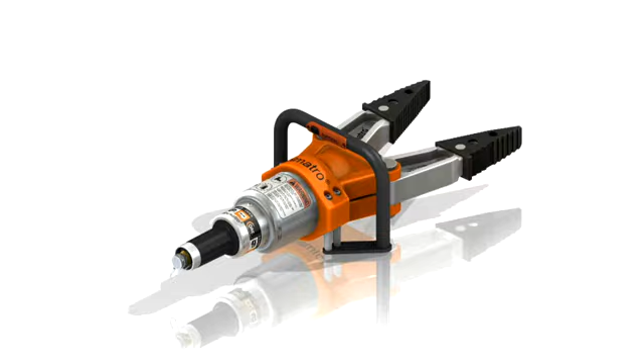With rescue equipment like this, performance is everything. The product must work reliably every time. SolidWorks contains a powerful set of tools we can use to test the performance of a design in many different ways. Two key areas that concern most designers are function and strength. Let's look at how SolidWorks Motion and SolidWorks Simulation tools can help us evaluate these goals.

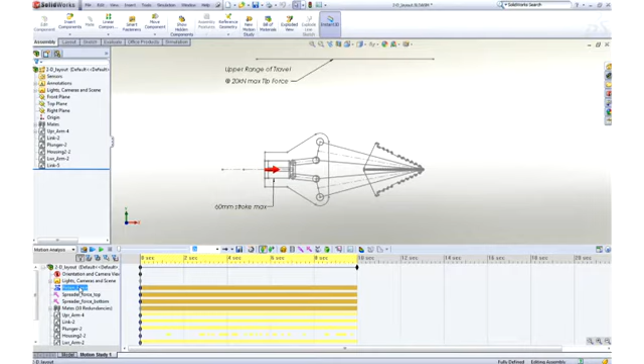We've seen how we can assemble our design in SolidWorks, but how do we know it's going to function correctly? It's invaluable to be able to validate the spreader operation without the need to cut metal or build prototypes, like in the case of this sketch layout concept. With SolidWorks Motion, we can easily test our design during the early stages of development to aid in sizing parts, bearings, motors, and actuators to ensure they meet our design goals.

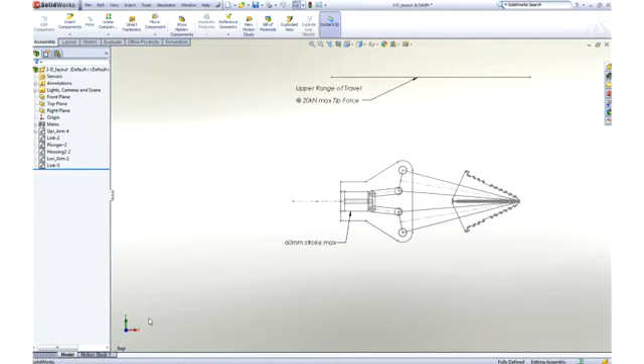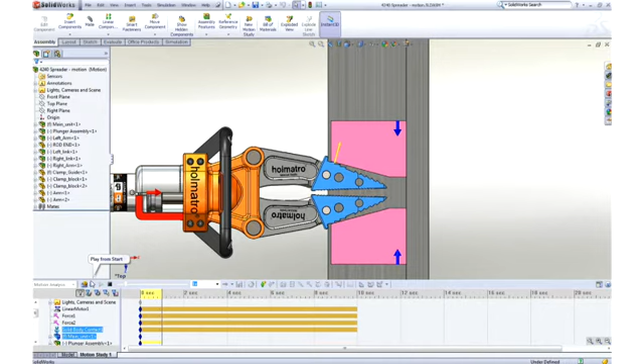As we go through and refine our design, we can continue to use Motion to validate the function. Here we have a test fixture to determine the piston force required at different jaw openings to meet a minimum spreader force requirement. In SolidWorks Motion, we need only apply an actuator to drive the piston through its range of movement, the desired spreader force on both blocks, and finally specify that the tips of the jaws and the blocks will contact. An accurate physics engine then calculates the resulting motion, forces, velocities, and accelerations.

We can look at a wealth of engineering data such as the bearing loads on the pins, how quickly parts are traveling, and so on. With the built-in plotting tool, we can quickly show the required piston force with respect to the open position.

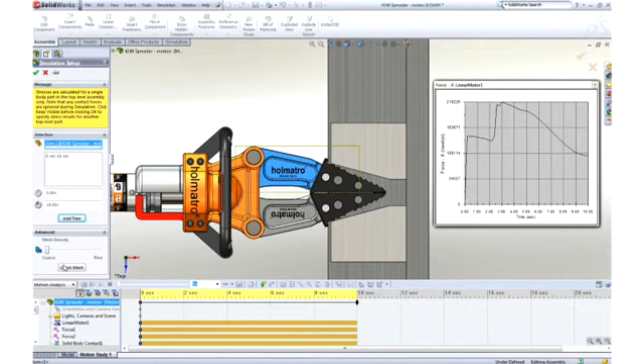We're even able to check the strength of selected parts in the mechanism over the entire range of motion. This can really help in determining if we need to use SolidWorks simulation for a more in-depth analysis to ensure that part strengths meet our goals.

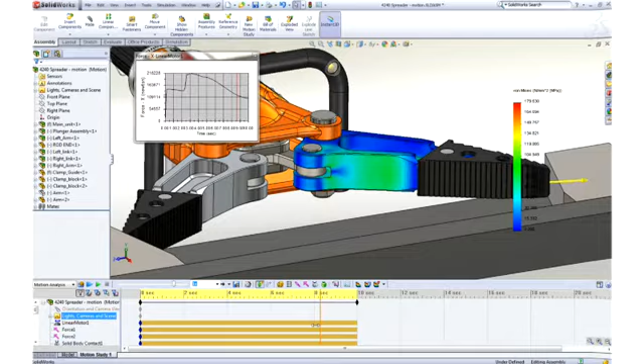Let's now focus in more detail on the structural aspects of our design with SolidWorks simulation. If we're concerned about parts failing, deflecting too much, or reducing weight, this is the tool for the job. Simulation can be used from the part level all the way up to the complete assembly to easily identify if the design will meet our needs.

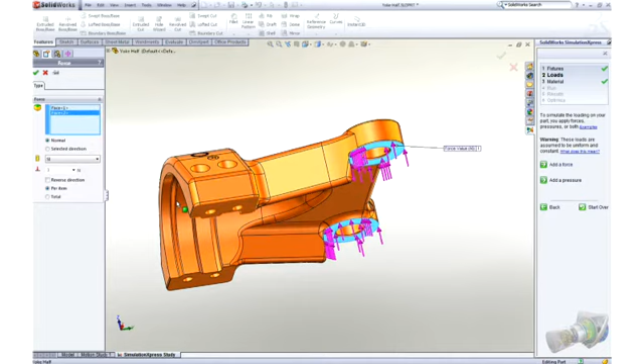You set up the model just like you would when doing an experiment in the lab. We start by using fixtures to hold a part in place. We make selections just by picking on geometry. It couldn't be simpler. We then apply loads to test if our part is going to fail or deflect too much. Visual feedback on the screen makes it very easy to understand how we've set up our test.

The checklist on the right-hand side makes sure that you have everything ready to test out your design's performance. After the simulation has run, you get immediate visual feedback on how the part is trying to deflect, which is great to confirm the test is set up correctly. It's easy to verify the factor of safety, stress, and deflection of the component.

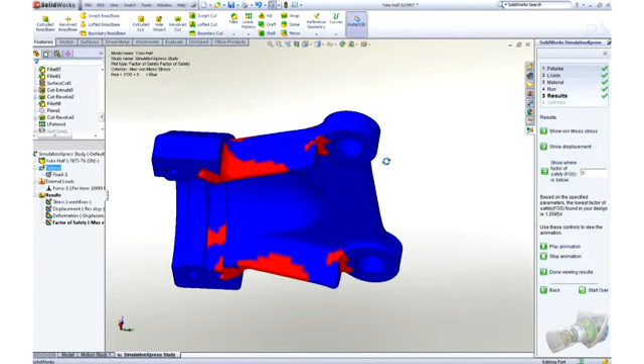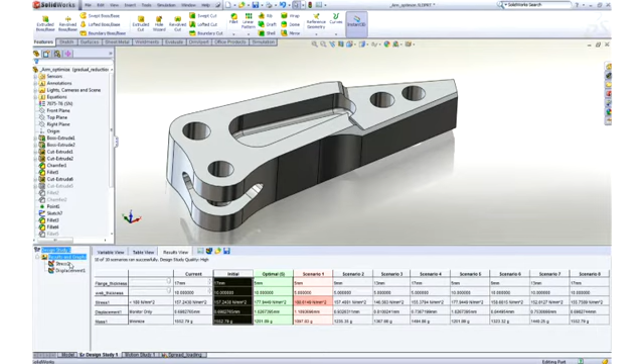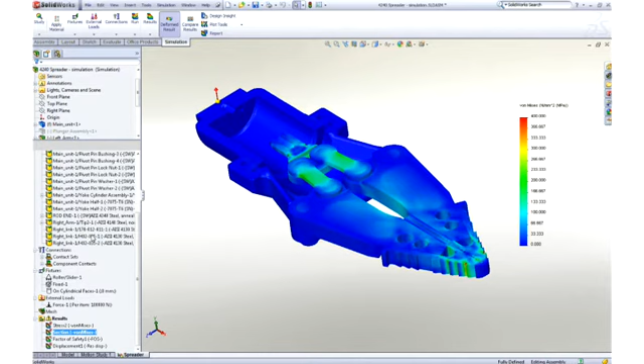We're even able to slice through the model to look at any internal sections. Results update dynamically for immediate feedback. With SolidWorks simulation, you can even look at vibration, heat, material yield, durability, and many other types of tests.

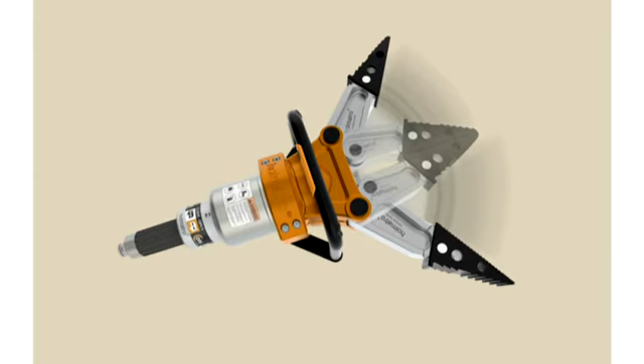With SolidWorks Motion and SolidWorks simulation, you can test your designs before you build them, cutting down on prototypes, helping to make sure it will work the first time, and reduce the time it takes to reach production. This has been your first look at SolidWorks simulation.